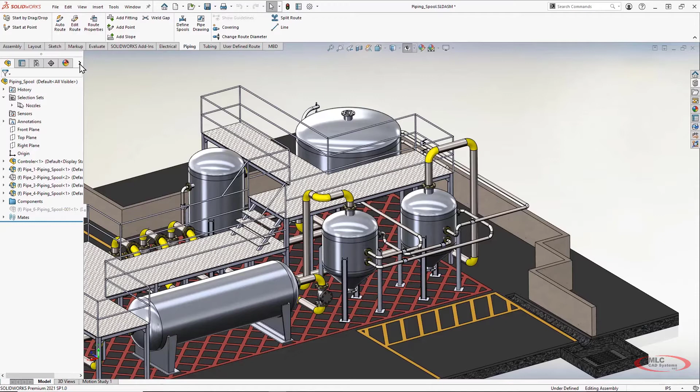And one of the things I really like to do before routing inside of a larger assembly is leveraging something called a display state. So sometimes whenever you're dealing with a larger assembly, you can get into a cluttered situation where you can't really see and access what you need. And that's where display states really come into play. Basically, they hide the clutter. That way you can focus on what you need to focus on.

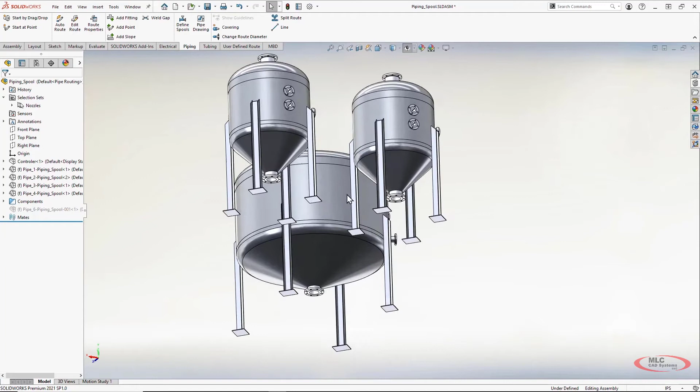So I'm going to rotate around under here to where I can see these 2 bottom nozzles a little bit more clearly. And I'm going to leverage something called a design library to just drag and drop the required parts into my assembly, and that's going to actually start my route. So design library is a great place just to store commonly used components that you can share with your team. That way you can help to reuse existing components and prevent duplication of work.

And what I'm using right now is just the out-of-the-box routing. The library that it comes with is really pretty nice and easy to use right up front. So right here, I'll go ahead and demonstrate how easy it is just to get started with a route. It's as simple as dragging and dropping.

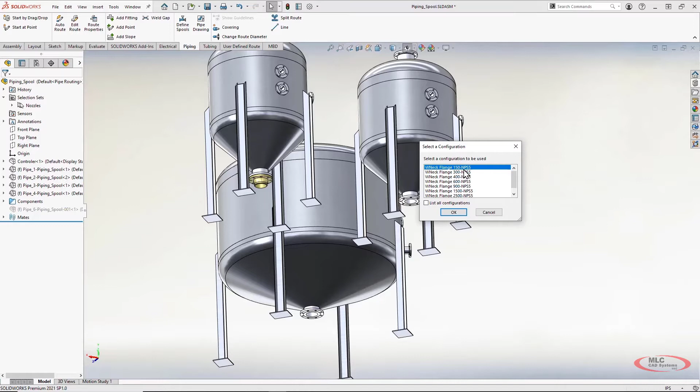And I want everyone to notice just how the flange that I'm dropping in automatically mates itself to the nozzle. And in addition to that, it's also going to automatically size itself. Notice that I'm only getting 5-inch pipe sizes here, and then I just have to select whatever class I'd like to use. So I'll go ahead and click OK to confirm that.

And this gets me into the route properties area where I have the ability and flexibility to select things like if I wanted to change up the schedule that I was using for this pipe route. Maybe I wanted to automatically include weld gaps or use a standard length of pipe. You can even come in and select what type of elbow you'd like to use.

So really a lot of flexibility here that you have available, but you also have the availability to create a template, and I'm going to go ahead and leverage this template that I've already created. That's just going to set this up to use Schedule 40 pipe along with some particular 90-degree and 45-degree elbows. So a little time saver right there just to have a template set up.

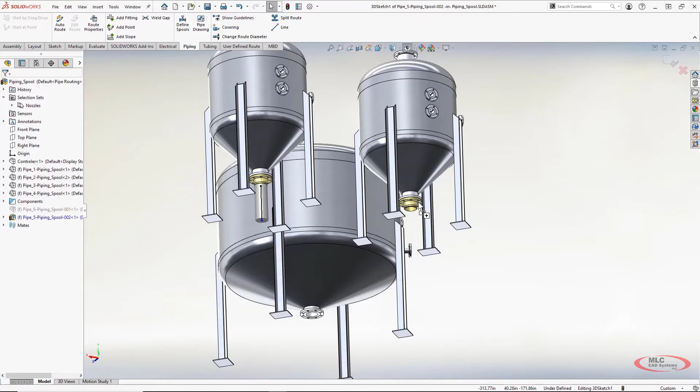And once you click OK, you get brought into the routing subassembly. So you can see the subassembly gets created right here in this area, and we're basically designing this route in the context of our large assembly. And what I'm interested in doing, I want to come in and drag and drop in another one of those flanges, because this is another area that I'd like to tie in.

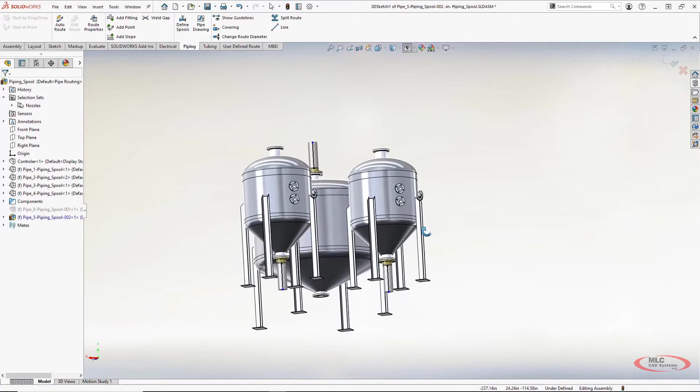And just to finish things up, I'll go ahead and add in the nozzle on the larger tank as well. And notice how whenever I drop these in, a little pipe stub automatically comes off of there. And I can use those to then route wherever I need. So there's a couple of different methods that you can utilize to route around with and to define where your route's going to go.

And one of those is just doing 3D sketches. So pretty simple, if you've ever done any type of 3D sketching. I'm just going to come in and grab this endpoint of the stub, and sketch wherever I'd like this route to go. I'll do the same thing over here.

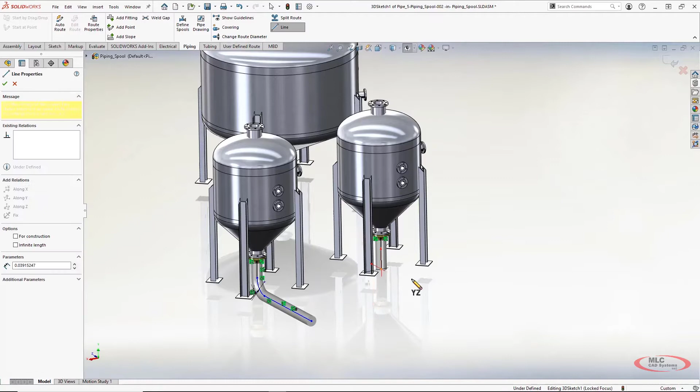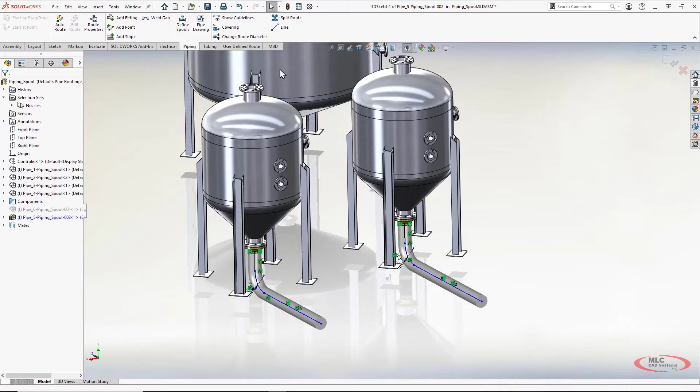And what I want to highlight is the fact that wherever I drew this 90-degree angle, a radius gets automatically added in. And that radius just so happens to perfectly match the radius of the elbow that I had selected in this route. So it automatically gets created and placed right there. Pretty nice little deal. I'll go ahead and continue, just designing our route here for a little bit. So like I said, pretty simple process just to come in and use your basic 3D sketching.

Now, since I have a segment of this pipe kind of terminating into another segment, what we're going to have to do is add in a T. And once again, you can just go right back to your design library and then click on your T's folder, and you have a couple of options here. You have either a reducing or just a straight pipe T, and I'm just going to drag this in.

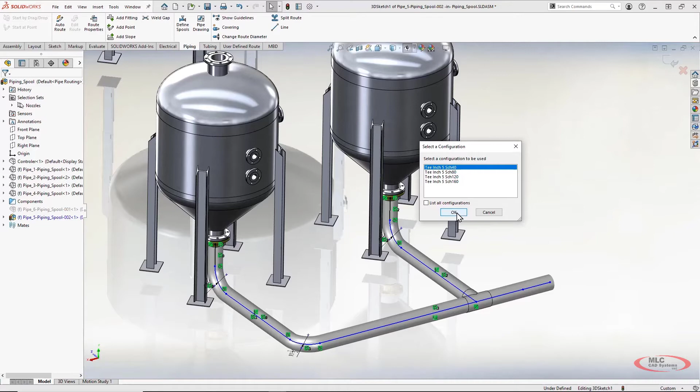Notice the automatic orientation though. So it automatically orients itself, and it picks up on the fact that, hey, this is a 5-inch piece of pipe, so I'm only going to give this designer options for a 5-inch piece of pipe. So I'll go ahead and click on the Schedule 40 for the 5-inch there, and that kind of knocks that out for us.

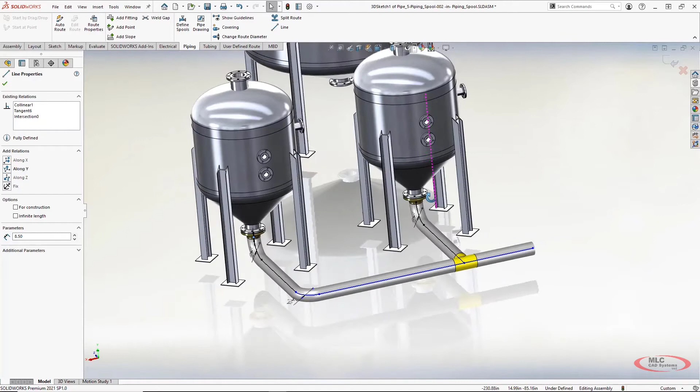Now, what happens if we want the elbow to be welded directly to the weld flange? Well, you have some flexibility here as well. You can just come in and remove those pieces of pipe, and it kind of just snaps right into position from there. So like I said, a lot of flexibility.

I'm going to hop out of the actual route for a second because I just want to clearly demonstrate what's actually happening right here. So I'll jump out of the route, and I want to bring to everyone's attention the fact that these elbows are their own components. Those will show up in a bill of material, but those automatically get placed wherever I made that 90-degree bend.

The other thing that's going on here, I'll expand my feature manager design tree for a second, is that inside of this route subassembly that we've created, all of the components get grouped into this little folder, so it's very well organized. And then the actual route parts, which are the joints of pipe, get placed into their own folder as well.

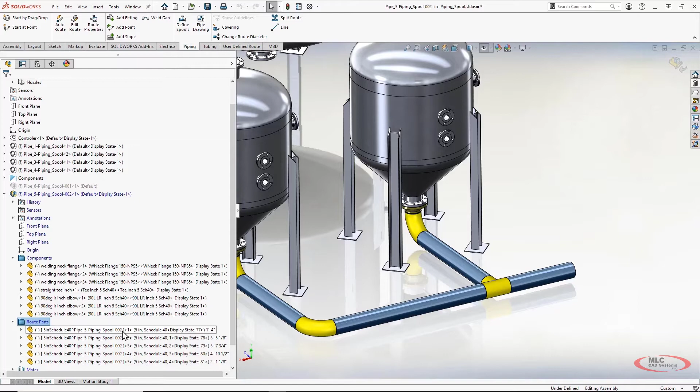And the beautiful thing that's happening in the background is that the cut length for all of these joints of pipe is getting calculated automatically. So all of that information is right here for us, and it updates on the fly if you ever make any changes. So that makes it really easy to leverage that information whenever we document our design, and I'll showcase that in a little bit.

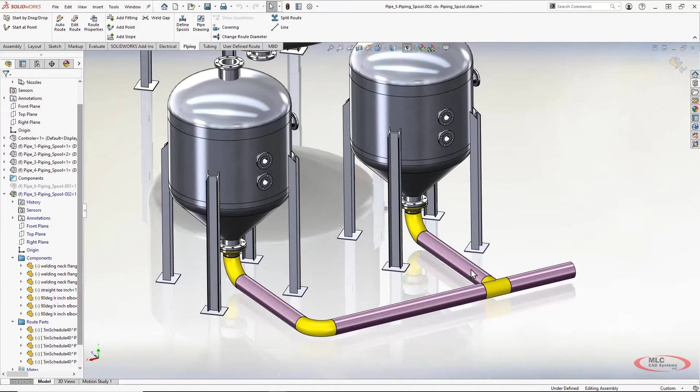All right, but for now, we got a little bit more routing work to do, so I'm going to jump back into this route and continue along with our design. Let's get a little bit more visibility because we're going to want to reference some of this geometry as we're designing along here.

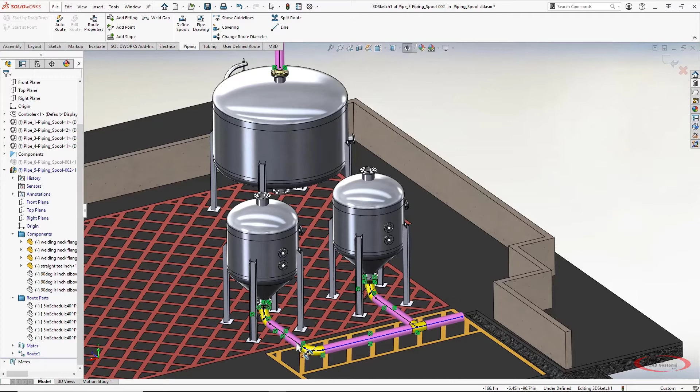By the way, I failed to mention, you can, of course, dimension any of these sketch segments to call out how long you want this route to be. So that's perfectly easy. I'm not going to focus too much on the dimensioning aspect of things, though. That's a little bit more mundane. But I do want to showcase the auto route capability.

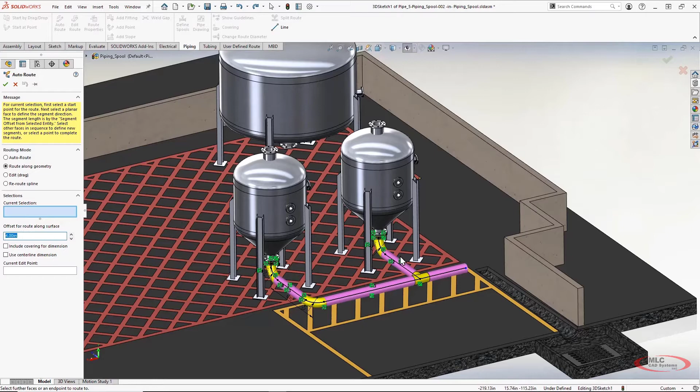So auto route is basically just what you would think it is. It's going to allow you to automatically route your designs. And the part of this that I'm going to demonstrate first is the ability just to route along geometry. So this just lets me select an offset dimension. In this case, I'm going to select 4 inches. And then any of the geometry that I click on, the software is just going to offset it by that value from that particular selection.

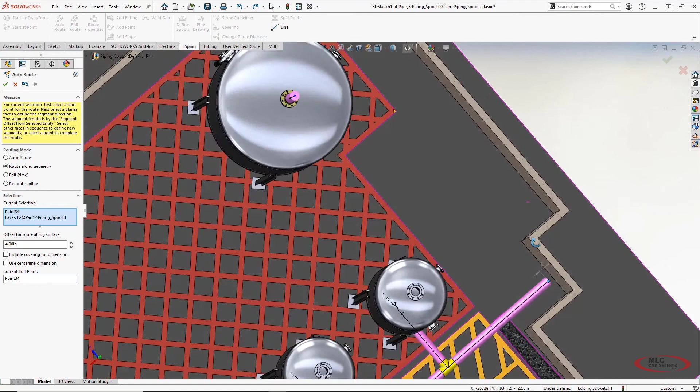So take a look. I want to follow this retaining wall that we have here. So I'm going to go ahead and just click on this wall right here. Notice the route snaps into position. If I want to make a turn, and like I said, I'm following the retaining wall, I can just come in and make this selection over here.

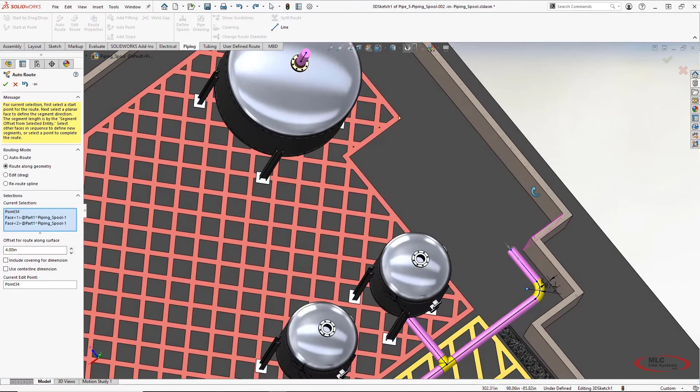And what's great about this is that it gives you the ability to flip the offset direction. So if I want, I can just simply right-click, and the offset direction changes to either side of that selection. Pretty nice, pretty easy. I'm going to continue to route along over here, and then we're going to go ahead and confirm from there. So route along geometry just makes it really nice and simple to follow existing geometry.

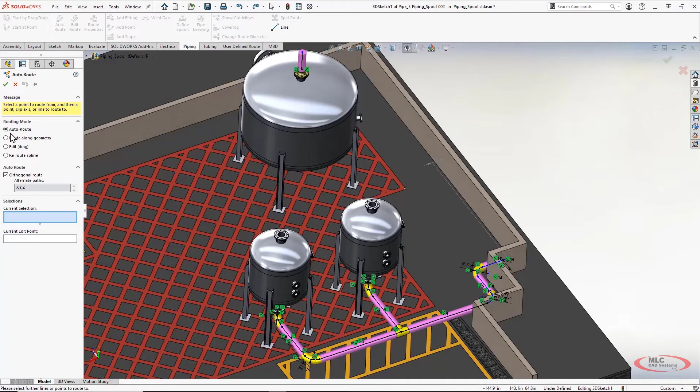And just to showcase another ability of the auto route functionality here, I'm going to use the standard auto route mode in this case. I'm not going to be routing along any geometry, but I'll select this endpoint of my route, and then remember we wanted to terminate that route over here where the larger tank is.

So from here I'm just going to select the other endpoint of this route and check out what happens. It automatically solves using an orthogonal type of route, and I have the ability to select multiple types of routes from here. Now not all of these are going to be perfect, of course. You still have to use a little bit of common sense here. But it's going to give you an array of selections that you can use for your route. And in our case, this is the one that I'm looking for. So I'm going to go ahead and confirm that.

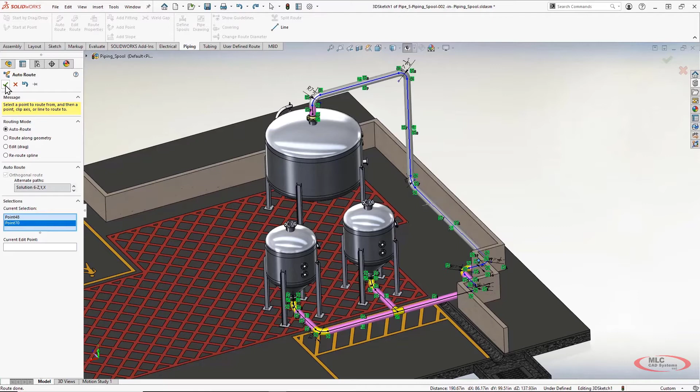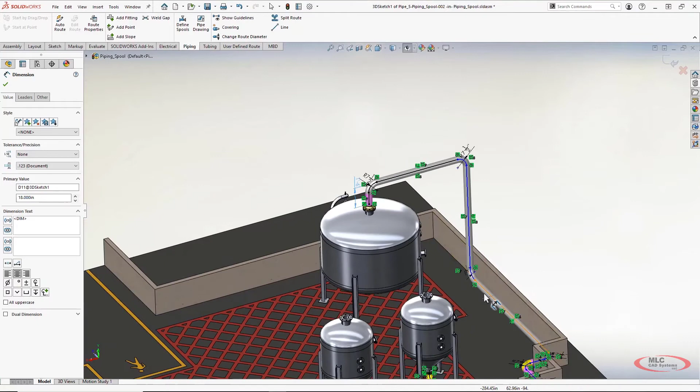All right, so that looks pretty nice. I'll go ahead and just add in a dimension to be a little more fully defining here. Let's just say we want that to be 1 foot 6 inches. All right, that looks good. I'm going to hop out of the route again just to take a look at what we've got so far.

All right, so our pipe route is starting to come together. We've used some route along geometry to easily define where we wanted it to go, and then we auto routed it from there, and it gave us a nice looking orthogonal type of pattern.

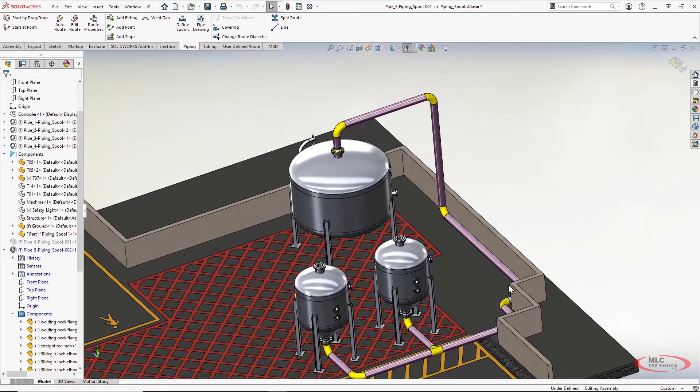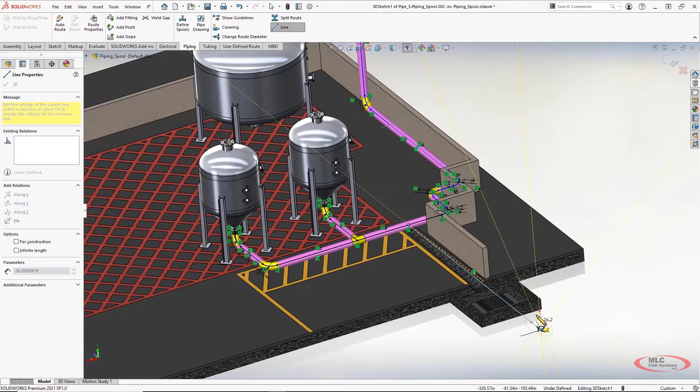So one other piece of functionality that I'd like to show here is the ability to easily add a slope to a joint of pipe. Maybe you have a drain pipe or something and you need to add a particular type of slope. I'll demonstrate that real quickly here. Once again, I'm just using some basic sketching. I'll tie in this little drain pipe right here. Let's go ahead and drop in a T for us while we're at it.

Once again, I want to draw attention to the automatic orientation and size selection that's going on here. Makes it pretty nice and easy to drop in our fittings where needed. And let's go ahead and add a little dimension here. We'll just drop that in at 20 feet.

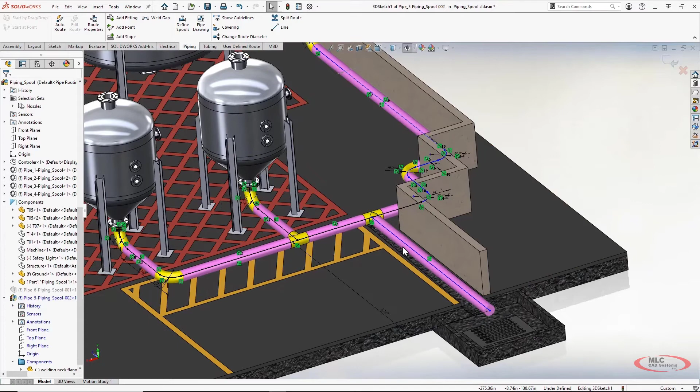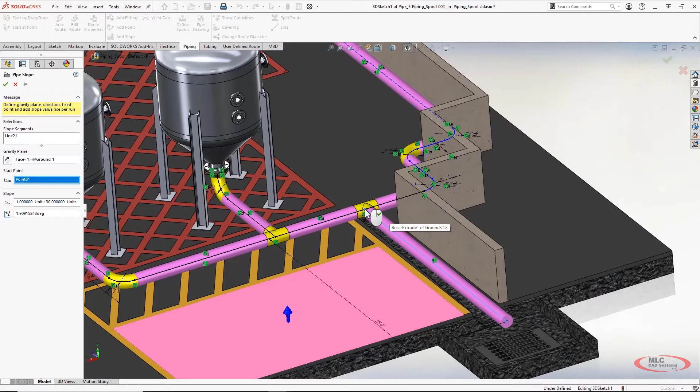But let's say we want this pipe that I just added to slope at a predetermined type of angle. We basically just come up to our toolbar again, hit our add slope, select which portion of the route that we would like to add that slope to, select the gravity plane, which in this case, we're just going to select the ground, if you will. And then you select the start point where you'd like the slope to begin. And at that point, it'll give you a nice little preview.

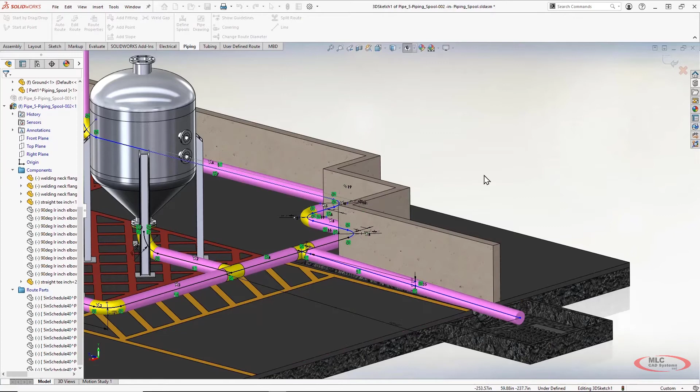You can see the yellow line is where the new pipe route is going to be. Of course, we do have the ability to flip that back and forth. So I'll go ahead and flip it to where the slope is going down. But we're just going to go put a 1/30 slope right here. Go ahead and confirm that. And there we have it. Our slope is created. I'll kind of move into a better angle so everyone can see this.

Oh, there we go. So you can see there's a 1/30 slope, and it's pretty much as easy as what I just demonstrated. So pretty nice little feature, piece of functionality there.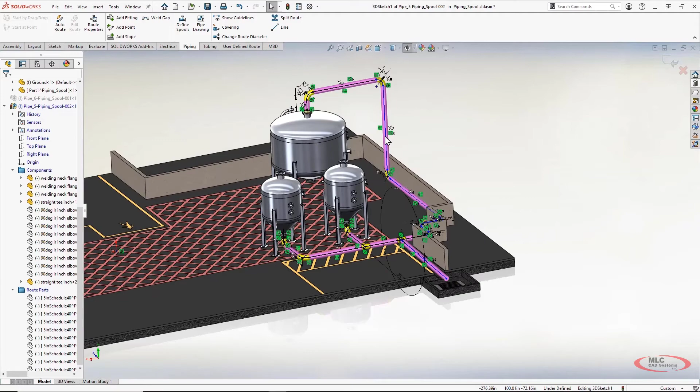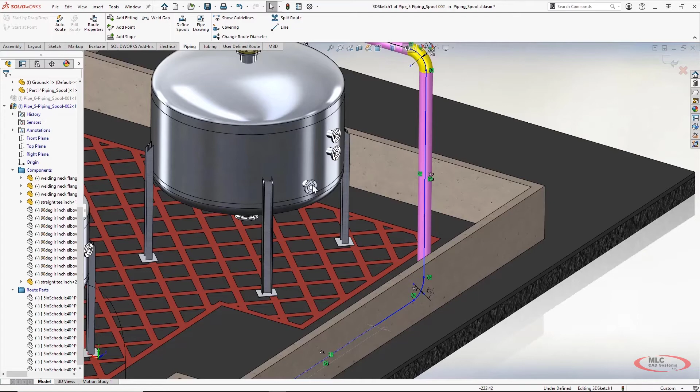Now, one other area that we need to come in and demonstrate is what happens if you're going to have multiple pipe sizes inside of the same route. So for instance, what if I wanted to tie in this little nozzle that was right here and tie that into my pipe route? Now this is a 5-inch piece of pipe, and that's a 2-inch nozzle. And I'll go ahead and demonstrate real quickly what our options are.

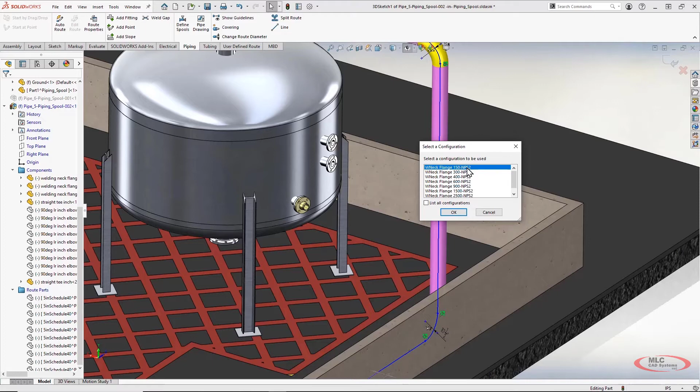I'm going to go back to that design library and drag and drop in another weld neck flange. Now take a look at what happens here whenever I do this. The sizing, even though I'm in a 5-inch pipe route, it automatically sizes it and picks up on the fact that that nozzle is only a 2-inch pipe size. So I can just come in, select that. We can hit OK. And the software is, of course, intuitive enough to understand that when you have a 2-inch flange, you're going to want to use a 2-inch piece of pipe. So it's pretty intelligent in that regard.

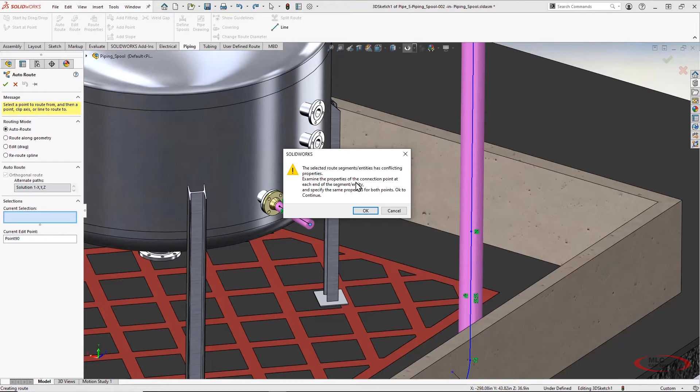And we want to tie that in over here in this area. So I'm just going to come in and we'll do a little auto route from that point to this new point. And the software is going to warn us. It's going to say, hey, the selected route segments, they have conflicting properties. So you're going to need to do something to address that. I'll go ahead and run with this for now. Let the auto route kind of solve this.

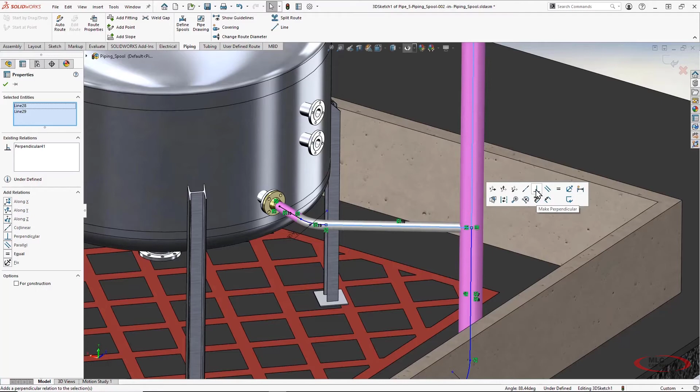All right. And we want this to be pretty straightforward. So let's go ahead and add a sketch relation just to make sure we're maintaining perpendicularity between those two routes. After that, we'll come in and we'll drop in a reducing tee right here. Once again, it automatically orients and it automatically picks up on the appropriate size, a 5x5x2.

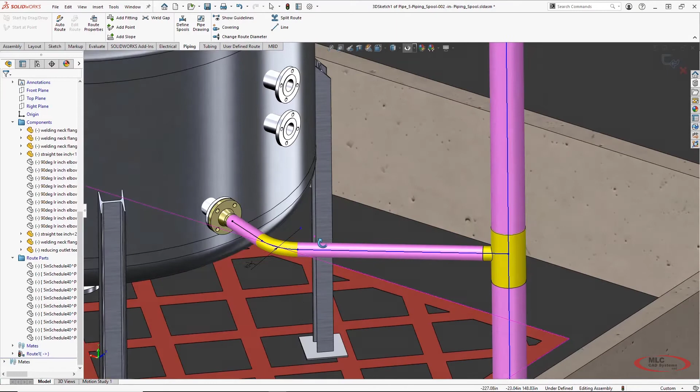All right. Now, I want to draw a little bit of attention over here to this elbow that we have. This elbow is not a 90 degree or a 45 or a 30 or any type of standard angular elbow. And we have a couple of ways that we can address a problem like this. I'll go ahead and exit out of this route to demonstrate that. So it's going to flag us. It's going to say, hey, we don't have a matching elbow. We don't have a 90 degree or a 45 or anything like that in our library that fits this, because this is a 51.9 degree angle.

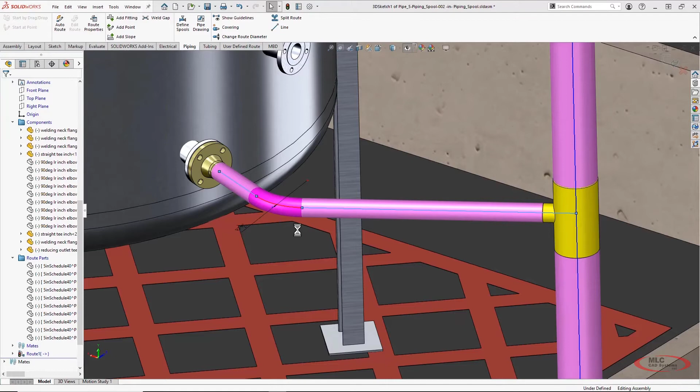So you have options, as you do with everything else in SolidWorks. You can either make a custom elbow or you can just bend that joint of pipe. And that's what I'm going to do here just to keep things simple. I'll go ahead and just select that I want to make a bend at that point. And when we hop out of the route, you can see that that joint of pipe now is just basically bent instead of including an elbow.

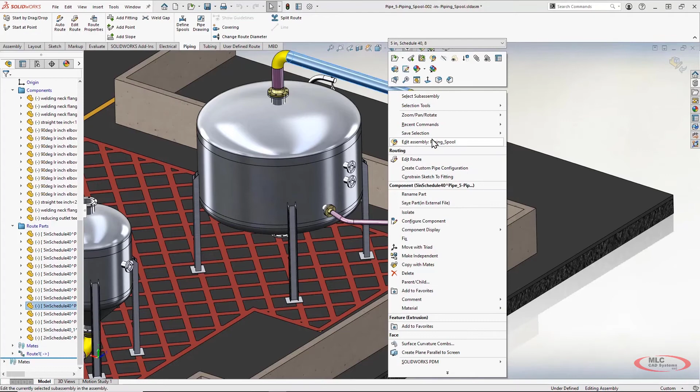So pretty flexible, gives you all the tools that you need to make whatever type of designs are required. Let's jump back into the route. Now, of course, we haven't really put any type of fittings or valves or anything into the route at this point.

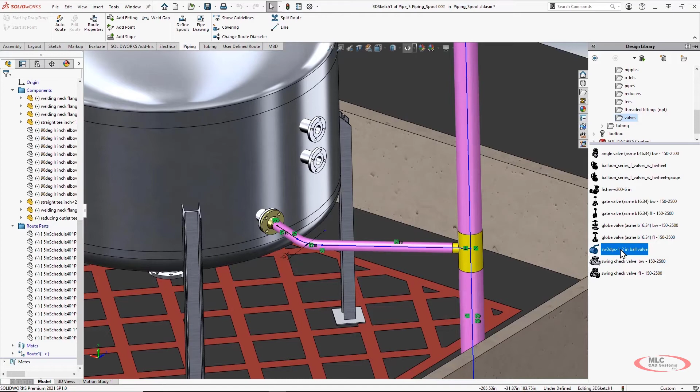So let's see what that looks like. You guessed it, back to the design library. Except this time, I'm going to jump into the valves area. And let's say we want to have a little ball valve right here. That way we can kind of shut off that flow when needed. So once again, it's just as simple as dragging and dropping. And then you do also have the flexibility to adjust the angular orientation of that particular valve that you're dropping in. And you can do that just by using your arrow keys. We'll go ahead and place that.

Whenever you drop in a valve, the great thing that happens here is that the pipe also gets split at that particular area. That way you keep an accurate cut list of what your pipe lengths are going to need to be. So pretty sharp right here. Let's go ahead and we'll drop in a few more of these just to kind of make our design look nice and pretty and be a little more functional. Once again, of course, you can rotate all these around. That looks pretty nice here.

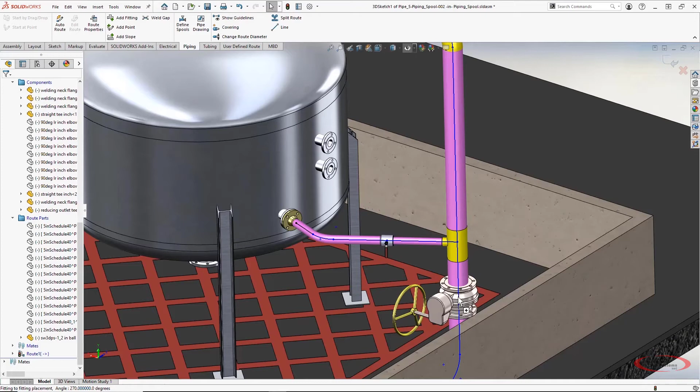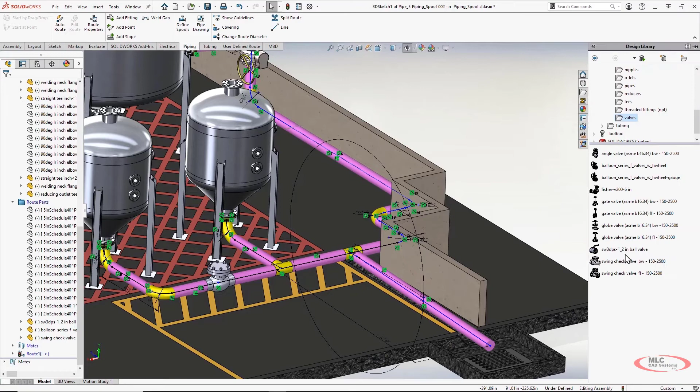And then let's go ahead and we'll add a check valve between these two, and then add maybe another valve here to shut off our drain pipe whenever we need to. Once again, these are all just default components that come with SolidWorks. So this is nothing that you have to go in and build. It's pretty much out of the box. Now, with that being said, you do also have the flexibility to customize and create custom fittings, custom valves. You can basically customize it to meet any application that you may need. But like I said, once again, pretty nice just out of the box.

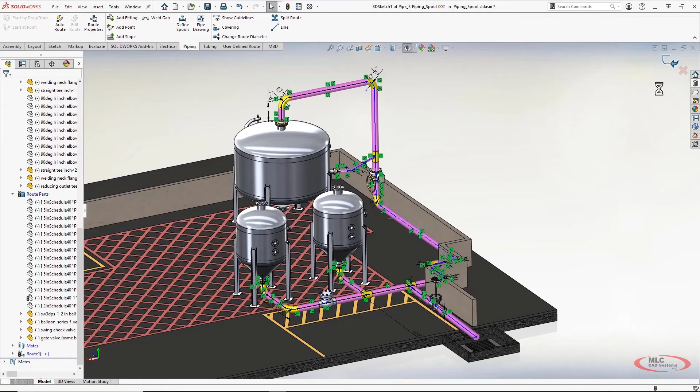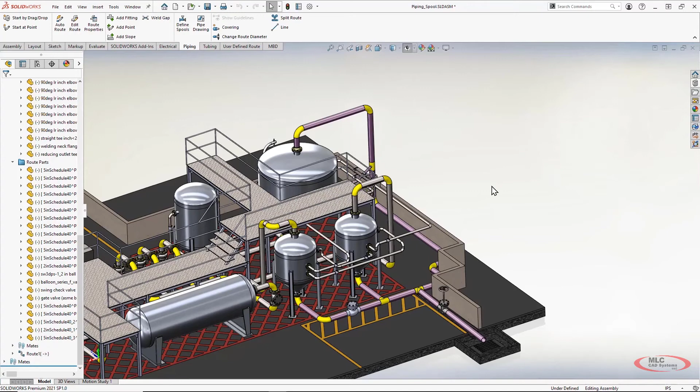All right, let's jump out of this route. I'm going to go ahead and open this in its own window. But we can kind of take a look. You can make sure you don't have any type of interference. Of course, you could turn on all the rest of your other geometry if you needed, just to make sure nothing kind of runs into anything. That's one of the beauties of doing all this in 3D as opposed to doing it inside of something like a 2D environment. All right, let's go and open this guy up in its own window.

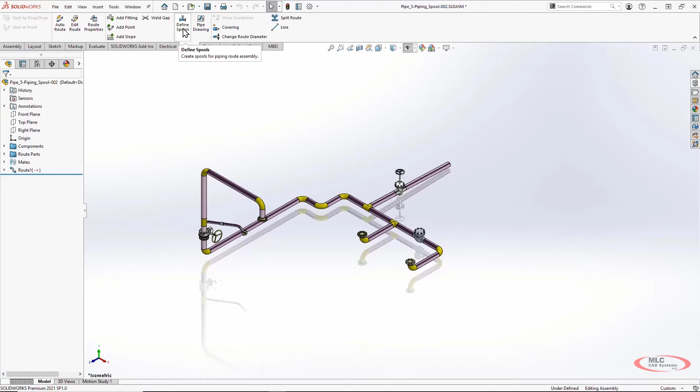Of course, you can make any type of modifications that you might need, but what we're going to be focused on is actually documenting this pipe route, because we're going to have to come in and fabricate this before we would install it. And one of the things that I like that is available here is the ability to define spools for a particular pipe route. And basically what spools do for you is it lets you split up your route into different areas. And that way you can have its own drawing or bill of material, and you can kind of track it separately. And to do that, it's pretty easy.

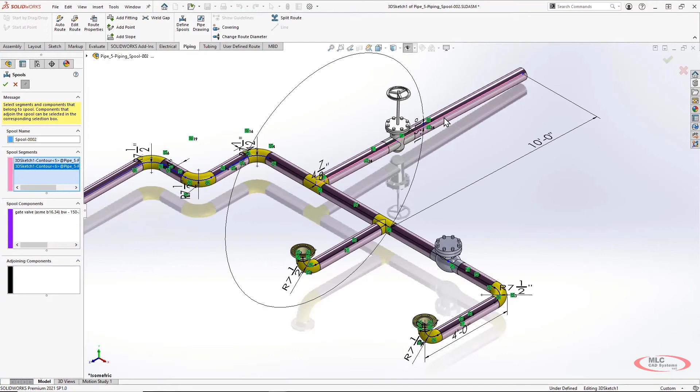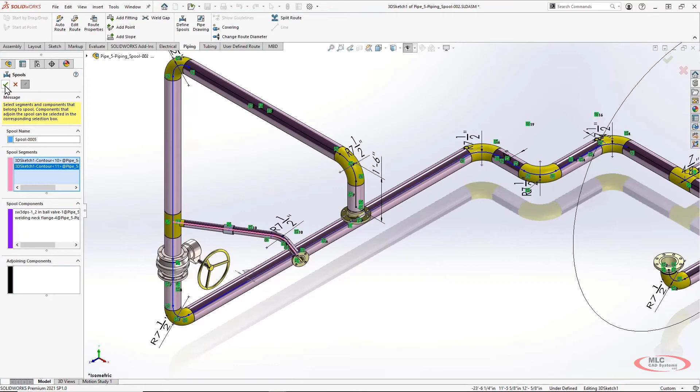What I'm going to do here is just enter into the define spools command. And basically, you just come in and select whatever points on the route that you would like to add to that particular spool. So let's say we wanted to fabricate all of this stuff up together. We could go ahead and we'll name that spool 5. We can click OK. And you can come in and just continue to define the areas that you want to fabricate separately just by selecting the segments of the pipe route. So let's say all of that will be fabbed up together. All of this might be fabbed up together. And then we'll come in and we'll do our 2-inch line right here separately. All right. There we go.

And what we've done here, we've basically organized all of this into their own spools. So if you select this little spool folder here, you can see it highlights on my screen. That's spool number 1. Of course, you can expand that and see all the components and pieces of pipe that make it up. And then spool 2, 3, 4, and 5. And the beautiful thing about this is whenever it comes time to make a drawing, having those separate spools gives us a little bit of flexibility. And I'm going to show you guys an automated method to create a drawing of this pipe that's just super fast. So, of course, you can come in, you can select whatever spools you'd like to bring over into that particular drawing.

We can select what drawing template we want to use. I'm going to create each of these individual spools on their own separate sheet. You do have flexibility to put them all on the same sheet or even make separate drawings, but I'm going to keep it simple and keep it all in the same drawing, just on different sheets.

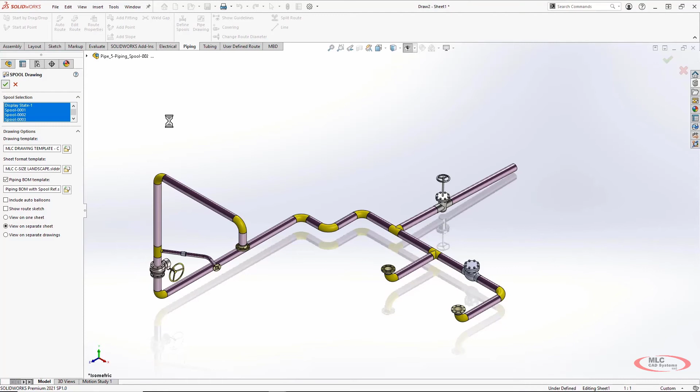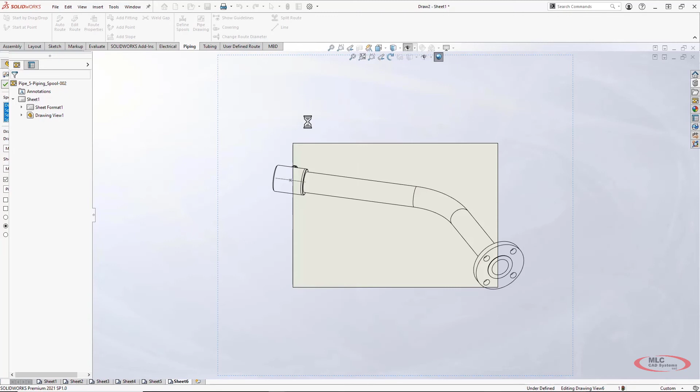Now take a look at what's going on here. As soon as I click this green check mark, we'll let the software do its thing. I'm not doing anything right here, I'm not driving anything. The software is going to make a drawing along with dimensions for every spool inside of that pipe route. So this is a great time to go get a cup of coffee while this is working, and you're basically just letting the software do the work for you.

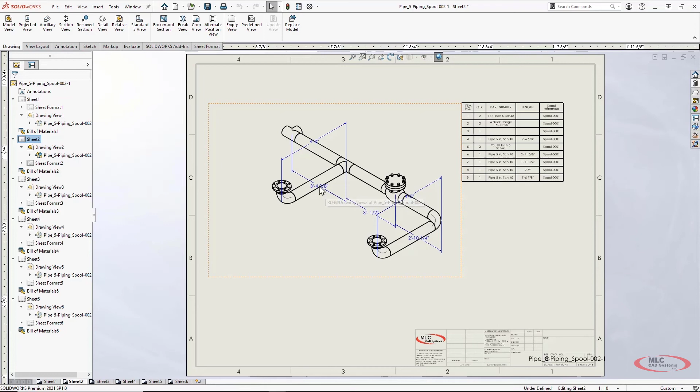Now, on each of these different spool sheets, basically what we've got going on is a bill of material that gets automatically created, and then the dimensions get created here as well. You do have the flexibility to automatically add balloons too, if you'd like. So that functionality is available.

Of course, this usually isn't perfect. Sometimes you have to come in and manipulate some of these dimensions so you can see them a bit more easily. But it just did this automatically, so I'm not going to be too critical of it, you know what I mean?

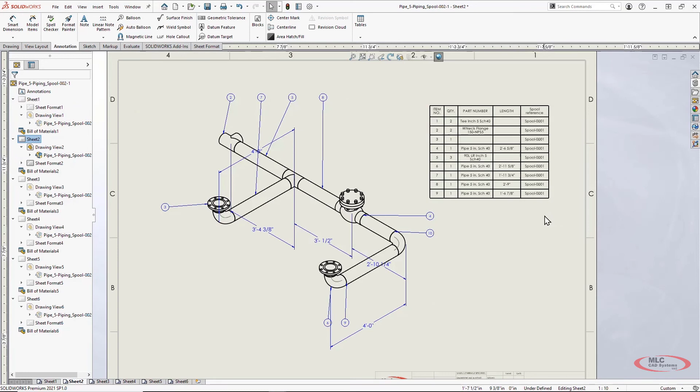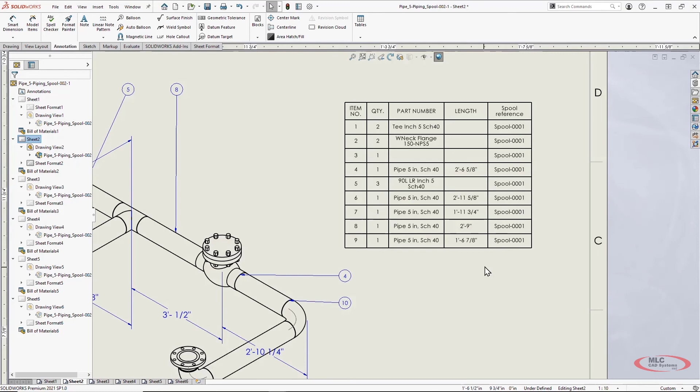I also want to call out that this bill of material is automatically generated. It gives us the part number we need along with the cut length for all the different joints of pipe. It also gives you a spool reference in this column, so it lets you know this is all for spool 1. Pretty intuitive, pretty nice and automated method we can use here.

One of the things I want to show is that all of this is fully associative, just like anything else inside of SolidWorks. So what happens if we have to come back in and make a change? Let's flip back into our main assembly.

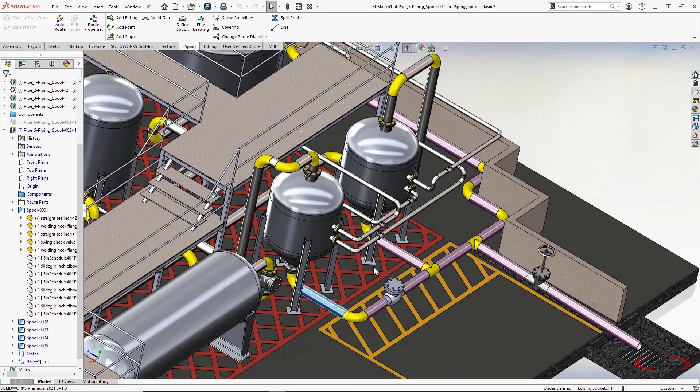You can see here, let's say we have to shorten up this length of pipe. If we shorten that up, it's going to also affect quite a few other areas of our pipe route. That's going to shorten up this pipe as well, and change the distance between here. But the beautiful thing is the software is going to take care of all that for us, and it's also going to take care of updating our drawing for us.

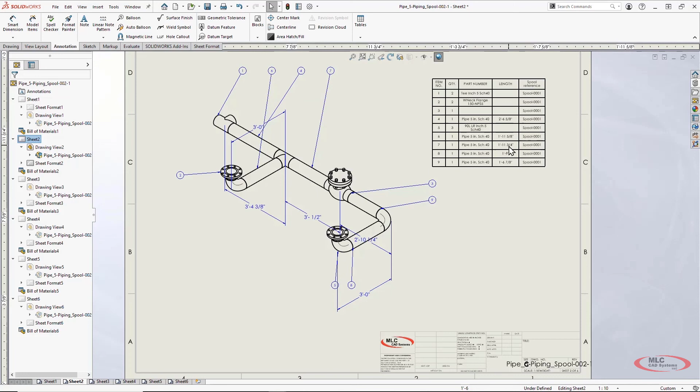So I'll jump out of this route and flip back over into our drawing. You can see that this 4-foot portion, I just changed that to 3 feet, and that updated automatically. So did all of the different cut lengths. Pretty nice flexibility and efficiency right there.

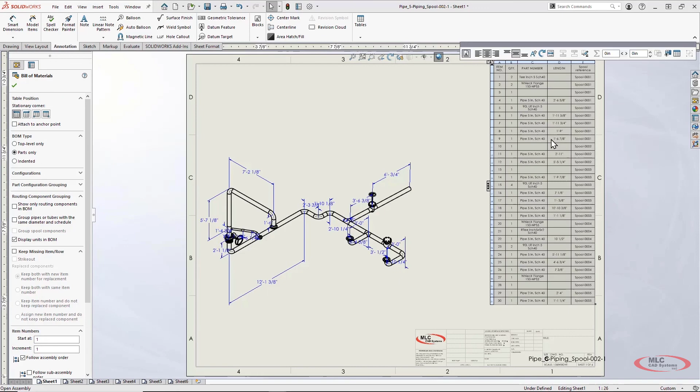I'm going to flip over into the main drawing for this route that we have, and you can see we've got a pretty decent sized bill of material, but we also have a few options of how we can group the piping in here.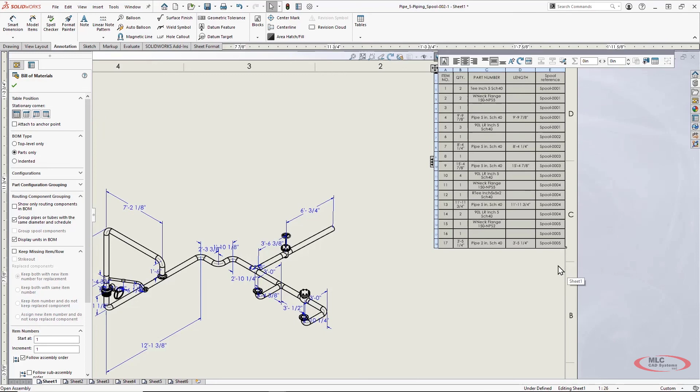You can come into your routing component grouping inside of that bill of material, and instead of having every piece of pipe at the top level split out into its own entity, we can group all of those pipes or tubes together. That way we can have more of a conglomerate of the total length of pipe needed for each spool. So here, this is grouping in all of the total length of pipe we'd need for spool number 1, spool number 2, and number 3.

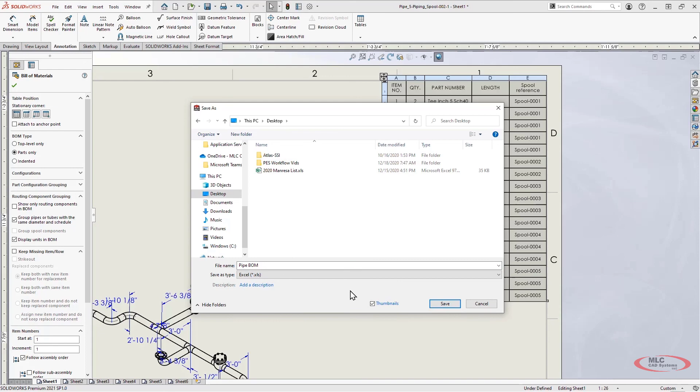Now, let's say we have to get this list of information over to our purchasing department. We do have the flexibility to save this out as an Excel document. I'll go ahead and save this out to my desktop. We'll call it a pipe bomb—don't say that on an airplane—and we'll go ahead and click Save here.

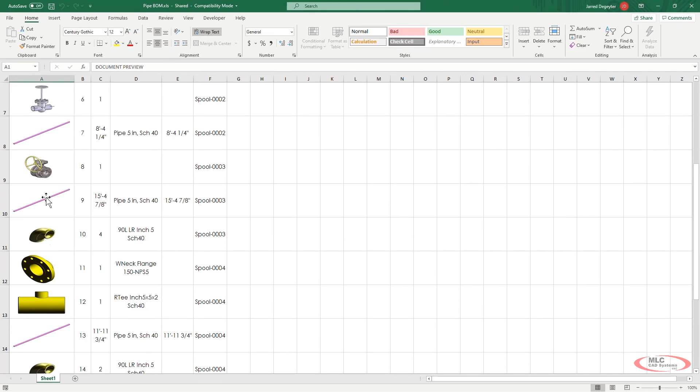All right, let's open this up now that it's saved. You can see we've got a really nice looking bill of material, and we can even include a preview of what that component is. That way you can give a little bit of additional information to your purchasing department, maybe preventing an error from purchasing the wrong component.

But really easy to share—you've got the length of material, so really nice and easy to give material takeoffs using this method.